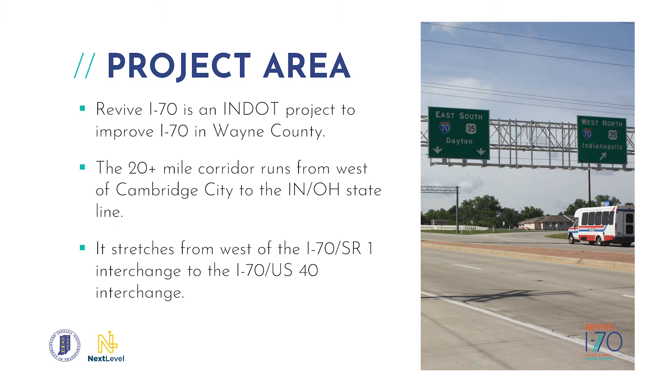Okay, so that's a good transition to what we call purpose and need. This is an important part of developing the project. When we talk about purpose and need, that is a very defined element of the project. But basically, for you and me, what it means is it's the why. The purpose and need is the why of the project. Why is this project happening? What are we looking at? What are some of the things that we want to take care of?

We also know that some of the interchanges here were developed a long time ago, and they met design standards at the time. Those design standards have changed. So especially there's a couple of interchanges that we're taking a look at. John's going to talk more about that. But what can we do as far as improvements for those interchanges to make sure that drivers, maybe they're not doing the weave, the crossing over, moving in front of traffic. They're not having to do that. They have more time to accelerate when they are coming onto the interstate. They have more time to decelerate as they're exiting. So these are all important.

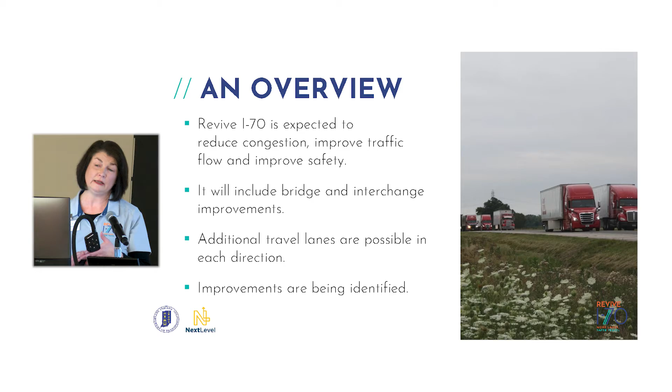So we'll have more meat on the bone when we get together. We expect late spring-ish, something like that. We'll get together for a public hearing. We'll talk more in just a few minutes about what that's going to look like. That's when we expect to have a preliminary alternative and more information. So this is a listening session, and the comments you're providing are very important. We'll take that back, review what you're telling us, and make decisions based on the information coming in to the project team.

So we do anticipate pavement improvements. We've talked about that already, very important. We expect bridge improvements. We talked about this being a very large corridor, more than 20 miles, with a lot of bridges in this project area—about 40 bridges. So that's a lot of defining what the needs are specifically with each of those bridges. John will talk more about that. There's a whole gamut of possibilities, a lot of different improvements we could see.

Couple of interchanges—if you visited the boards, you already saw those. This is a big one: additional travel lanes. Those are possible. Are we going to be adding a third lane? We can't say with certainty right now, but that's something this team is exploring. We're looking at traffic numbers, issues for the corridor, and exploring the possibility of an added travel lane. We'll have more definition on that issue when we get together again.

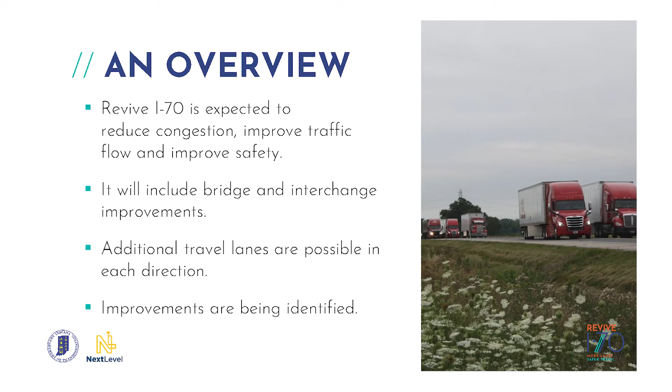So we're working to identify those improvements. We talked again about all of those bridges that need improvement—that might be a new overlay, that might be painting, that might be an entire bridge replacement. Lots of things John will be talking about. We're also looking at widening those bridges. We want to make sure they're able to accommodate an additional travel lane, whether that's now or in the future. That's important.

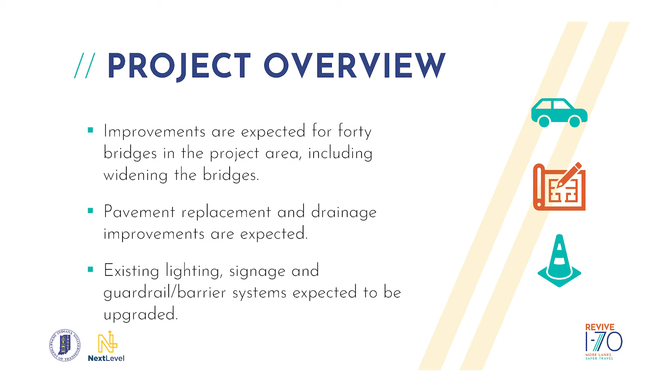We already talked quite a bit about the pavement and how much attention is needed there. We know that's nearing the end of its service life. Then when you start talking about that replacement, all of the drainage—that's a very big deal. So we want to make improvements there that will add decades of more life to that.

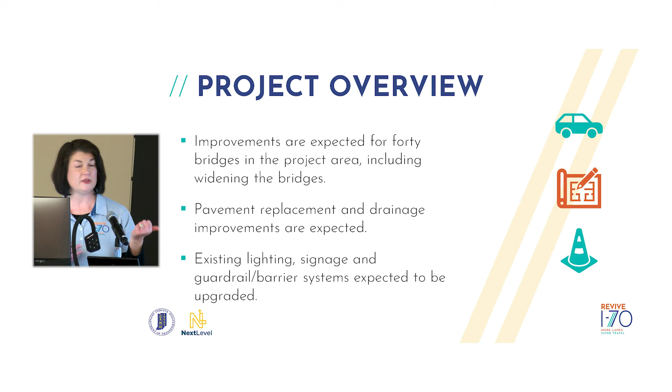And then all of the things you would expect when you have corridor-wide improvements: lighting, signage improvements, guardrail, barrier systems. All of those things are expected to be upgraded.

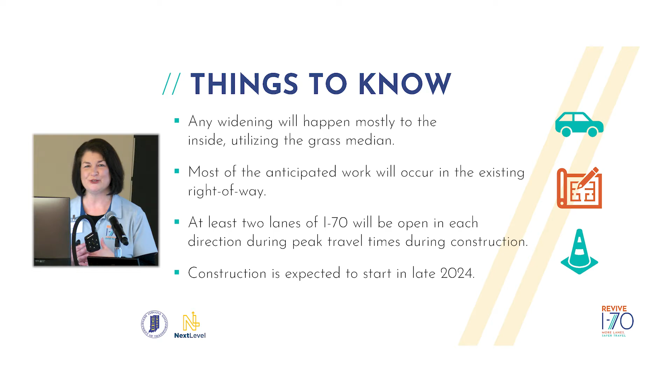So what do we know? Because I've already told you that we don't know all of the details yet. What can we tell you today? There are a few things we can tell you, information you can walk away with.

Any widening that does happen—so if we do have an additional travel lane for a portion of this project area or for the entire project area—we already know most of that widening is going to happen to the inside. So if you drive I-70 today, you have that very wide median, that grassy area, that's where the widening would be happening.

Because that's where any widening would be happening, we can tell you this next item: very limited right-of-way needs with this project. There are no takes with homes, very, very limited. So we have the real estate to work with if we move forward with an additional travel lane. So that's important to know.

People want to know about construction, what that might look like. We can't tell you today how long it would last because we still have improvements to identify. We have a lot of specific information to put together.

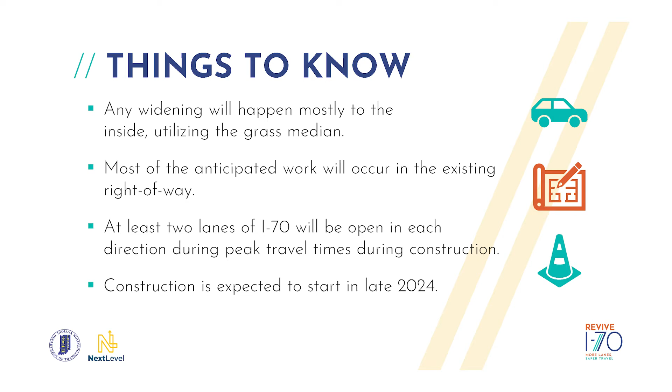And honestly, the person who comes on board, the contractor, will have their own plans for developing. So we can't really tell you duration because this is a large corridor. We could wind up with multiple contracts for this project, but we do have a targeted date. We expect late 24, early 25, construction will start.

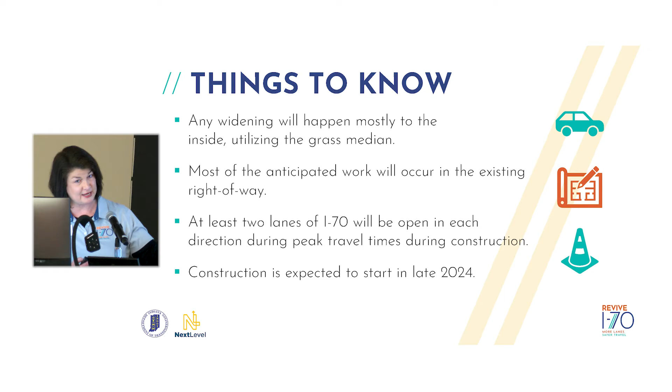We also expect, because we've already talked a little bit about maintenance of traffic, during that construction we expect to have at least 2 lanes of I-70 open during peak travel time. We can't always maintain that, but during peak travel times, we'll keep those lanes open during construction.

So big picture, we already talked about this, we're in the environmental and design stage. Right now is when we're taking a look at the corridor and saying, what needs to happen here? Then we identify those solutions. That's the next time we get together.

Throughout this process, there is a tremendous amount of coordination that happens with local, state, and federal officials. That's a very important part of this process. You are a very important part of this process. That public input, does it matter? Absolutely, it does. Does what you tell us tonight matter? Yes, absolutely. So do share any comments, concerns, thoughts, suggestions.

And then we talked again, that construction duration, just don't know yet. It's going to depend on a couple of things, including how we phase construction and funding available at the time. And with that, it's really a good time to hand off to the guy who is at least going to be able to put a little more detail on some of the improvements that we're talking about. And I'm going to turn things over to John.

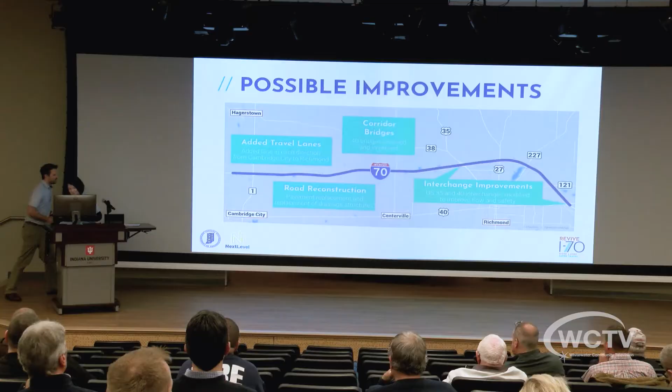Thank you, Mindy. So yes, possible improvements. Again, going with that generic terminology like Mindy said, because we don't have all the details right yet. We are still looking at all those items as we develop the NEPA document.

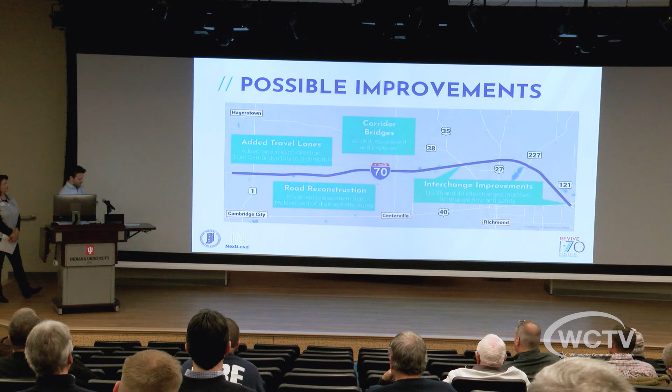But as she mentioned, we got road reconstruction. The pavement is at its near expected lifespan, and so now we have to replace it. We're all tired of going out there and watching workers patch this pavement constantly every other summer, it feels like. So now it's just time to replace it.

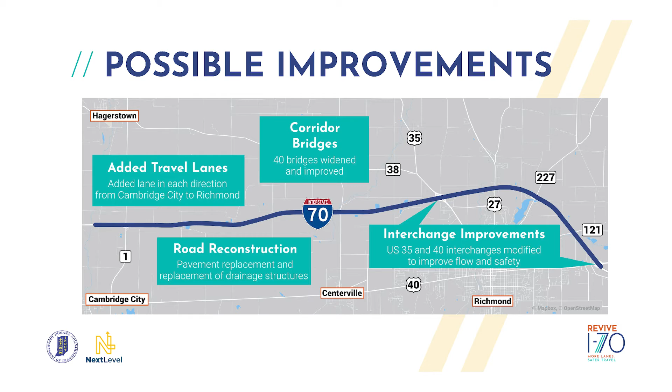Interchange improvements, we're going to be looking at 35 and 40. The corridor bridges, there are 40 of them. Most likely all of them on 70 are going to have some kind of work done to them. And then we'll be assessing the corridor for an added travel lane in each direction.

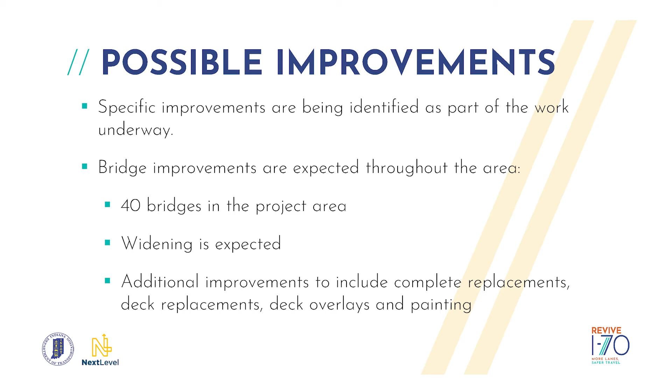So when we start diving a little bit more into it, with the 40 bridges, chances are we're going to be doing some kind of work to all of them on 70. If the third lane is warranted, we'll be widening every single bridge. But for the most part, we'll be doing some kind of maintenance.

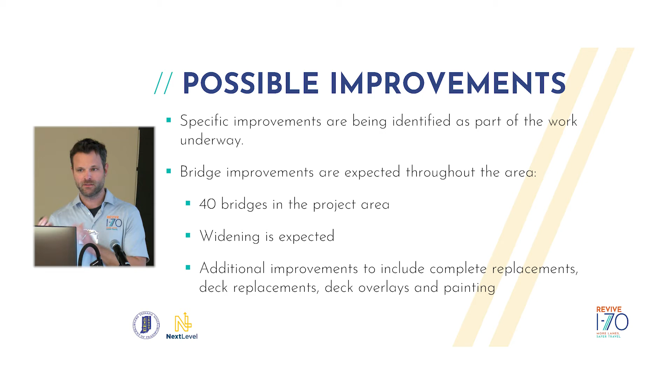And that's basically doing maintenance on a car. You still have to do maintenance on a bridge, whether it may be some patching or maybe an overlay. When Mindy mentioned painting, that's what's happening to the underneath side. When you see those beams, they may look a little rusty. We actually go through, clean the rust off, and repaint them to help the longevity and help keep those bridges lasting longer and safer for motorists.

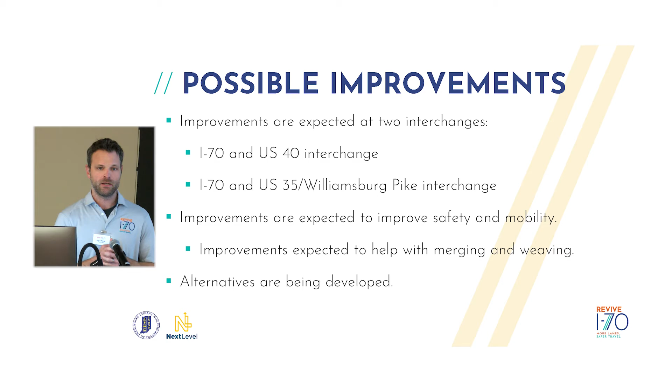The possible improvements, I said US 40 and US 35. Right now we're looking at anything from minor improvements at these interchanges to major redoing the interchanges. That is going through an engineer report and analysis right now that hopefully we'll have more information on later this spring. We're also looking at possibly getting rid of or improving the merge and diverge areas as well as some of the weaving movements.

We are going to replace all the lighting at all the interchanges. We're replacing the signage. We already mentioned the pavement. With that is the drainage, as Mindy said, and then possibly upgrading some of the positive protection. So you see a lot of guardrail out there. It looks a little tired, a little mangled, a little rusted. We'll be replacing all that as well.

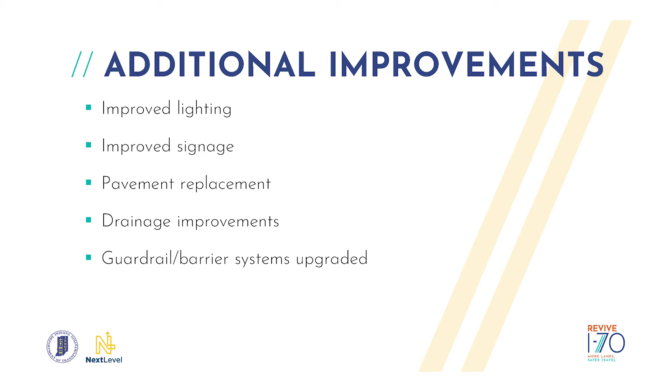So the project process, how do we get from where we were a year ago to getting this actually into construction? So we are in the environmental process. We're in the purpose and needs study. We have been working on this project for a little while just to start gaining some existing information, whether it's traffic related, crash related, starting to talk to the public about what can we do with this area.

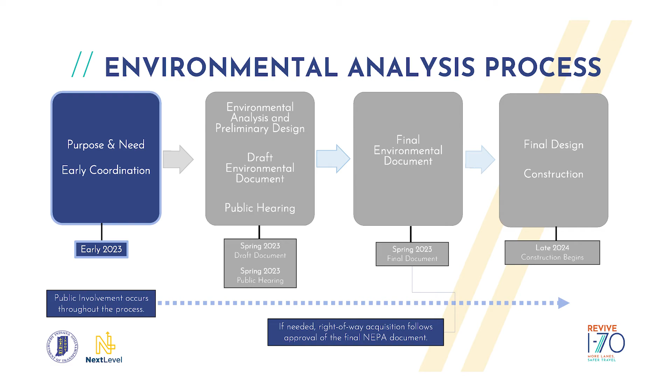Then we'll go into a draft environmental document this spring, as well as a final environmental document, and in between will be the hearing. We expect those to be late spring, sometime in spring. And then we'll go into final design with construction beginning in late 2024.

So preferred alternative, again, very generic right now. These conversations get public input to know what are some of the problem areas within this corridor and how we can alleviate or improve them. A lot will come out with that NEPA document, the environmental document, that we'll be able to share with the public.

Like Mindy said, we really don't have any details for you right now other than what we shared, but when we come to the hearing, you might be able to see a typical section - actually if it will warrant a third lane or not, if there are any noise walls being proposed as well.

So with that, I'll hand it back over to Mindy to talk about how you all can figure out what the process of the project and progress is going. So thank you. All right.